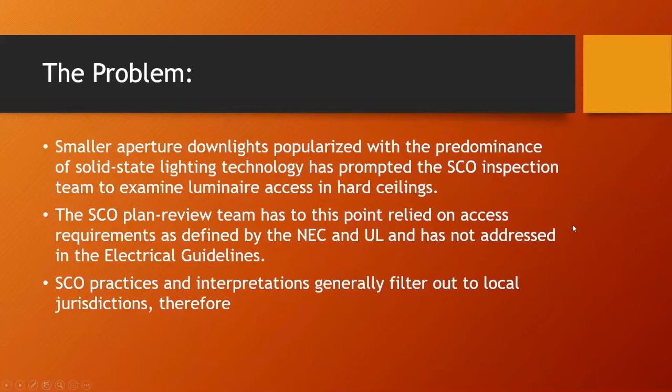She's muted. So state construction practices and interpretations often filter down to local jurisdictions once they get wind of things. So even if you don't work on state construction projects, this could affect your project.

So first off, what are we talking about accessing? So of course we have the light module. We want to be able to replace this because unlike 5 or 10 years ago, we know they do not last forever. We also want to be able to replace the driver because we know that is likely to be the first thing to fail. And we need to be able to access the wiring within the junction box. And in the case of a hard ceiling, there could be other junction boxes that need to be accessed from that aperture that is allowed by the NEC.

So the traditional means of access, just to review, is once you pull out your light engine assembly, your reflector, and the light engine assembly, then you basically need to pull the door down on your junction box where your driver is attached, or formerly a ballast. Pull that through the aperture, and then you also need to be able to reach up through that aperture to the junction box in order to make connections or remake connections in some cases. And you need to be able to have a visual line of sight to that junction box.

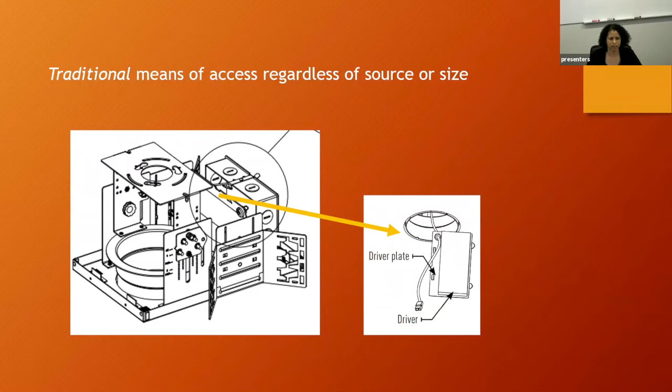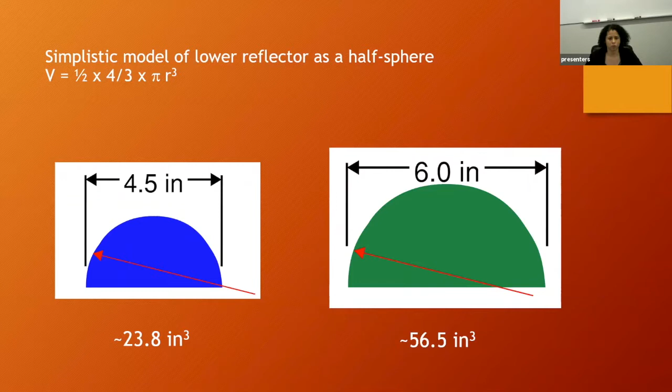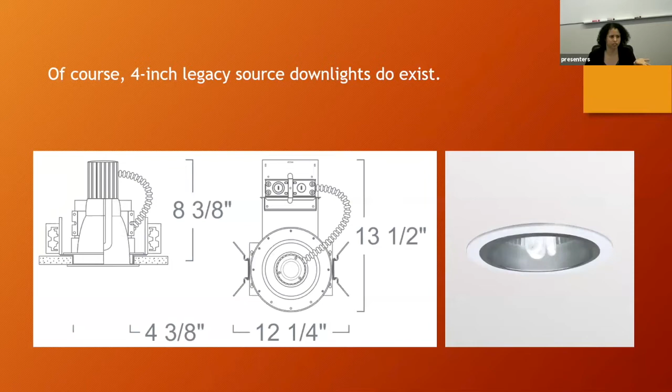So looking at what we can rely on for a definition of accessible. We're looking to the NEC, and in Article 100, there is a definition for access, and there's a couple of them depending on the context of the situation. And as applied to wiring methods, it basically says, don't break anything. You can't break your building. You can't destroy finishes trying to get at the junction box. So it's kind of wide open there.

And what the NEC doesn't really tell us is a specific working clearance. Unlike equipment access, it's not telling you how many inches or millimeters or centimeters, whatever you want to go with in metric. It's not telling you how much space you need to be considered accessible. It's not telling you how much time it takes. Well, if you can get at it, even after an hour of sweating and cussing, is that still accessible? So in terms of the NEC, it would seem that could be interpreted pretty widely.

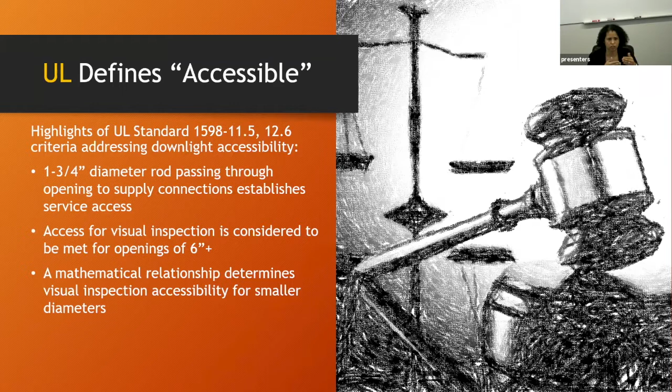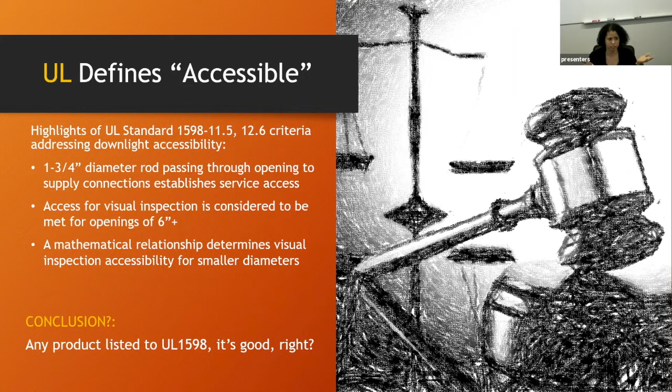So one of the conclusions here: we're thinking if it's UL 1598 listed, or third-party tested to UL 1598, we're good, right? That should do it. Well, unfortunately, that still depends. Because first off, if you want to actually get the standard, they're kind of expensive. I looked it up and you could get a copy of UL 1598 for the bargain price of $934. So for most people, for most firms even, that's kind of an investment in one document just to be able to dissect and inspect for the criteria that you want to adopt into a specification.

Also, manufacturers' cut sheets rarely actually list that they're even listed to 1598, for one thing. But there's also multiple varied compliance paths. If you read even the excerpt that I was able to get a hold of, it reads kind of like a choose-your-adventure novel, where you get the if and the then and the or and the unless. And so there could be multiple compliance paths, and there could be compliance paths that get you to a listing, but don't necessarily guarantee access or accessibility of the luminaire for service and inspection.

The scope actually applies to all luminaires for non-hazardous locations for 600 volts or less. So that's a lot to pack into a UL standard. So the conclusion is that you need to do your homework. As a specifier, you need to really understand the product, get the samples, try to get yourself into a situation where, whether it's hanging off the end of a table or if you've got a way to support it overhead, you can try to see if you can access it.

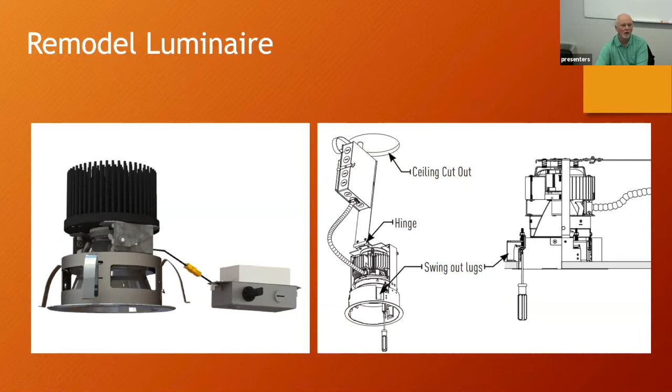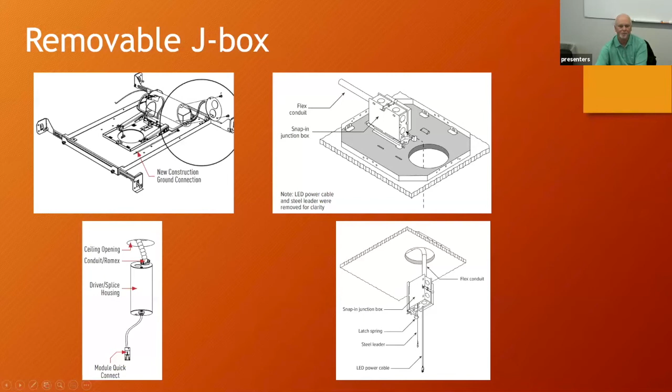Now, as Leah mentioned, the removable JBox type fixtures are somewhat limited by manufacturer. It depends on the manufacturers out there. Do they have this option? But what it does give you is typically the same amount of options that you would get in a traditional downlight, from lumen output to beam spreads, reflector finishes, et cetera.

So just another example of a JBox housing where everything comes down through the housing, your connections are made, and then everything would go back up through the aperture. And there's no need for accessibility, because the only thing left in the ceiling is the frame.

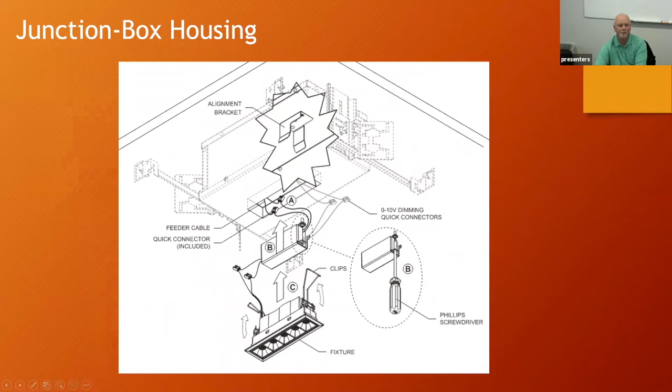This would be an example of a position-dependent JBox or fixture, which basically is you have your aperture here, but this JBox actually slides on a rail. So you can easily reach up, slide the JBox over, and then with the twist of a little thumb screw, everything comes out through the bottom. Easily seen. There's no danger of reaching up in there blindly. Everything is seen from below and removable from below. And again, a lot of these slides we're showing already show the LED array or module being removed.

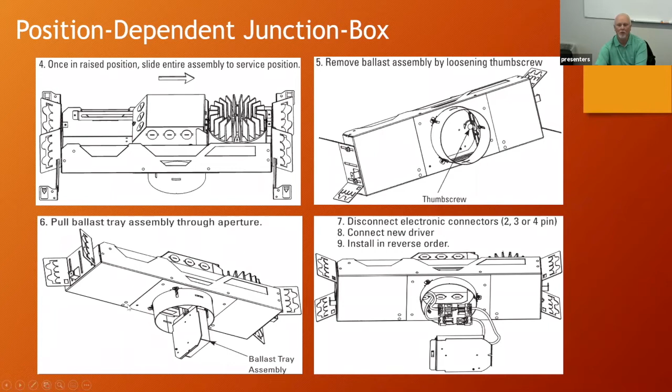Let's see what my next slide is. Okay, application conditions for the design team. Of course, you got aesthetic goals, use of downlights with the desired aperture, the ceiling type, the ceiling configuration. I touched on this before, especially for the architects and the engineers that are on the call. A lot of times you may not see the ceiling detail or the reflected ceiling plan. A lot of times when I see plans, I will see the E-sheets, the electrical sheets. It doesn't necessarily tell me what type of ceiling I'm dealing with.

So for the specifiers that are on the call, I would encourage you to collaborate with your reps, and your architects with their engineers and engineers with their architects, to make sure that everybody's aware of the ceiling types where these fixtures are going, and the accessibility requirements that go along with that.

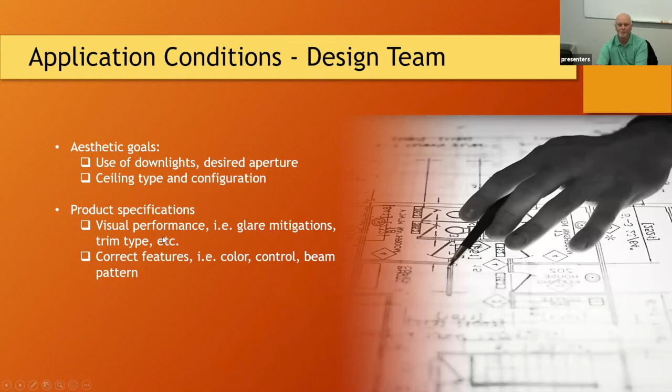Now, this would be application conditions for the construction team, i.e. the general contractor, the CM, and the electrical contractor, and the folks that are doing the ceilings as well. Again, we're going back to these access applications. Is it going to be top access? Even though you have a hard ceiling, do you have access from above? That's just a question.

The other thing that we're going to talk about in a few minutes is, do you have any other junction boxes in those ceilings that are not attached to the fixture? How are you getting your fixture whips to these fixtures? They're coming from a junction box somewhere. And as I stated before, I think you're limited to a 6-foot whip from a junction box to the fixture.

So what do you do if you have a conference room, for example, where the entire ceiling is sheetrock, like this conference room I'm sitting in now, roughly 24 by 20, something like that. You may have a lot of recessed can lights in here, and they're going to be farther than 6 feet apart.

Well, how do you get your switch leg conductors to each one of those fixtures and still comply with state construction's 6-foot whip rule? And how do you do that so that you don't have a junction box above the ceiling that is not part of the fixture assembly, but still needs to be accessible?

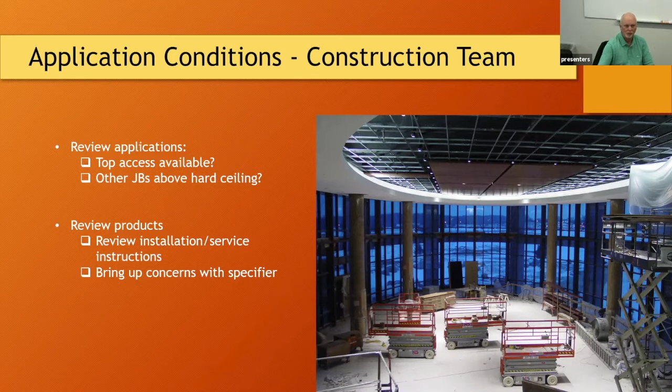So this next diagram shows you a room that may have a junction box in the middle, and you're coming off of your junction box with these whips. These whips are 6 feet in length, but where is this junction box located? If it's above that hard ceiling, it is not accessible because it's not attached to the junction box that is on this recessed fixture.

So I don't know how many people have seen this type of detail in the past. This detail works great if you're in an ACT grid ceiling because the junction box is accessible. So here again, I'm getting a little ahead of myself, but how do you access this junction box in a hard ceiling?

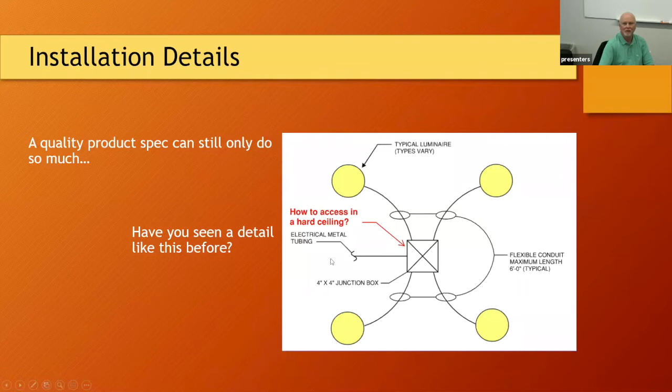So next slide, you have the option to do through wiring. First thing you have to decide is, is your fixture even rated for through wiring? Some of them are, some of them aren't. It depends on the size of this junction box and what this fixture is rated at. So now you say, well, I'll just come out of my junction box that is in an accessible ceiling over here to my first fixture, and I'll jump between the fixtures. Well, how do you do that when you're more than 6 feet apart?

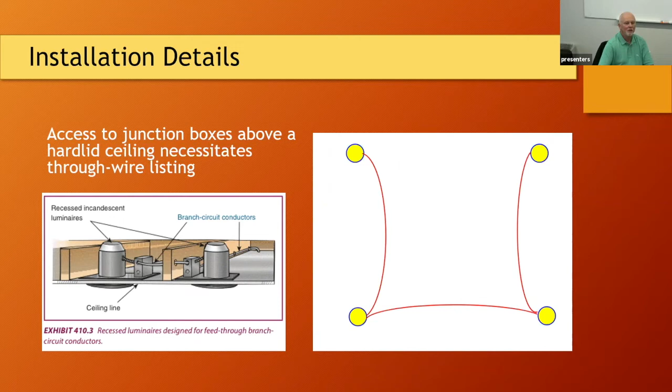So this is my interpretation. It does not mean it's the right interpretation, and obviously your state inspectors are going to want to jump in on this next slide. But this is just an idea that I came up with as a former contractor to get around the 6-foot flexible conduit restriction that state construction has. And that is to transition from EMT conduit over to flexible conduit using an EMT to flex connector. That way you can through wire when you have distances greater than 6 feet between your fixtures in a hard ceiling that is not accessible.

Okay. Next slide is, or you can do access doors, which nobody really likes, to get to your junction boxes on your recessed lights. So this is a quote that Leah put in here: if the mountain won't come to Muhammad, Muhammad must go to the mountain.

So what kind of risk do we have out there? Unsightly access panels is one, because nobody likes those. If state construction inspectors come out and find a problem, now you might have a schedule delay. You might have change orders because the contractor is going to say, hey, you approved this fixture in the submittal. I put them up. So who's going to pay me to take it down?

And then lastly, it may open the door for litigation from somebody. And if anybody's ever been a part of litigation, they don't just sue one of you, they sue everybody and then let the court figure out who gets to go home. So nobody wants to be a part of litigation, that's for sure.

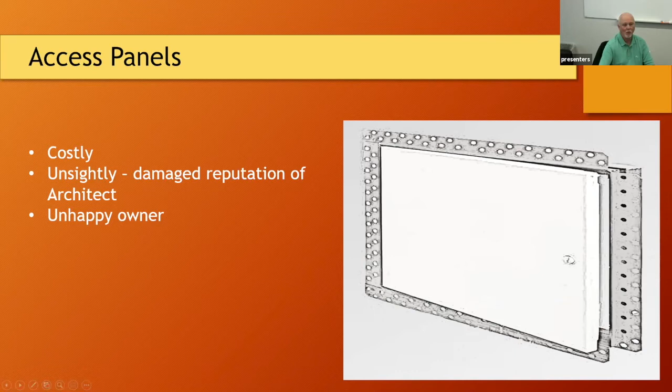And then we're going to go over schedule delays, liquidated damages. Are there liquidated damages on the project? Most of them do. Is this going to trigger a liquidated damage? These things typically come up when the inspector comes for final inspection and they're trying to get the building open. So that's not going to make the owner very happy if you tell him he's got to tear a ceiling down and either redo the ceiling or put in some access panels, etc., to get access. So again, you're damaging the reputation of the construction team, the CM, and you have an unhappy owner.

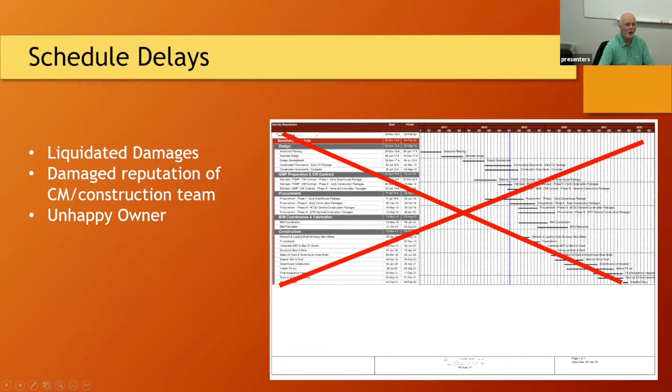Of course, then we got change orders, professional liability claims, freight, restocking fees. And as a rep, I want to talk about the restocking fees for just a moment. Unless it's an off-the-shelf product, once it's been installed, you're not going to get any restocking. You've bought those fixtures, you own them. You can use them on your next project in an ACT ceiling if you like. Again, damage to the reputation of the specifier and/or the supply team, which is me typically, and an unhappy owner.

Then, of course, we go back to the ugly L word of litigation. Who may initiate litigation? It could be the manufacturer, because the manufacturer might say, well, my downlights are accessible, I have a UL listing, and I'm not going to replace 300 or 400 downlights for free. The electrical contractor may do it. The general contractor could do it. The specifier, the manufacturer's rep. Basically, anybody and everybody can litigate if there's enough money at stake.

And then we're going to have some questions and answers. We're going to unmute Bob, I think, aren't we? So that we can get comments. Yeah, you can unmute. All right, hold on. I'm trying to figure this out, Bob. Give me a second. There's also still a couple people in the waiting room. Oh, well, we're done. Well, they might join the discussion. Yeah, I'm unmuted. You're unmuted. Okay. All right.

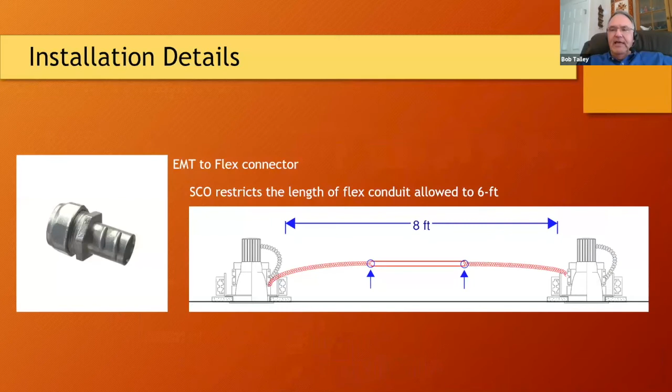Personally, as a PE... This one, Bob? No, the other one that you had with... We'll keep going. That one. Yeah, one before. That one, I think, is the one you showed.

Yeah. Okay. If that is truly where the junction box is for the other end of the flex, wherever that is, that has to be accessible for the life of the electrical system. That's just the way the NEC is written, and we are building 100-year buildings for the state. 50 years from now, we've got to get back to that point. And if somebody has put in 6 foot of flex or 8 foot of flex and they stretch it to the very limit, it's not coming down that hole. These are things that need to be carefully thought through.

And as a PE, personally, I wouldn't specify a 4-inch aperture unless I know that I've got access points all around it. There's not enough data to me that says we're not going to have problems with the installation, and I don't need that much hassle in my life. Well, I'm too old for that.

To your point, Bob, as a specifier who works on a lot of public projects, I'm not always worried about code minimum anyway. So even if, let's say, that UL listing conveyed some standard of accessibility for the product, because I've heard it before, if I've got a client who says we're having trouble maintaining it, because it's difficult, doesn't have to be impossible, but if it's difficult, then I want to, as a service to my client, provide them with a product that allows for enhanced access at minimum.

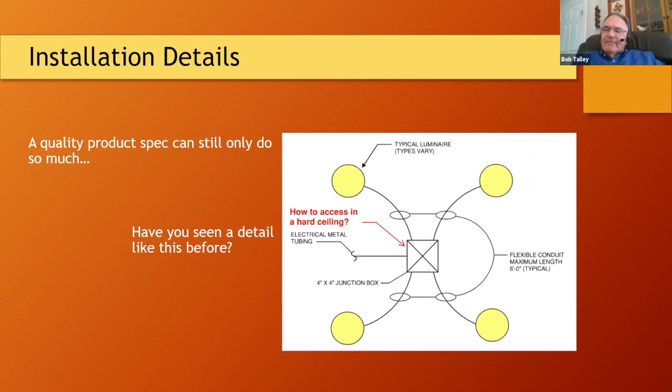So we're over time, but I just wanted to see if there were any other burning questions. One here is asking if there are any other light types that are not desirable for the state construction office. Bob, if there's any pet peeves, that's about as far as we'd get with that. Yeah, that's just it. It's all about access, and it's keeping people safe. Okay. Amanda Brooks brings up a good point, because remember there are going to be junction boxes for other than the lighting systems in the space, on hard ceiling.